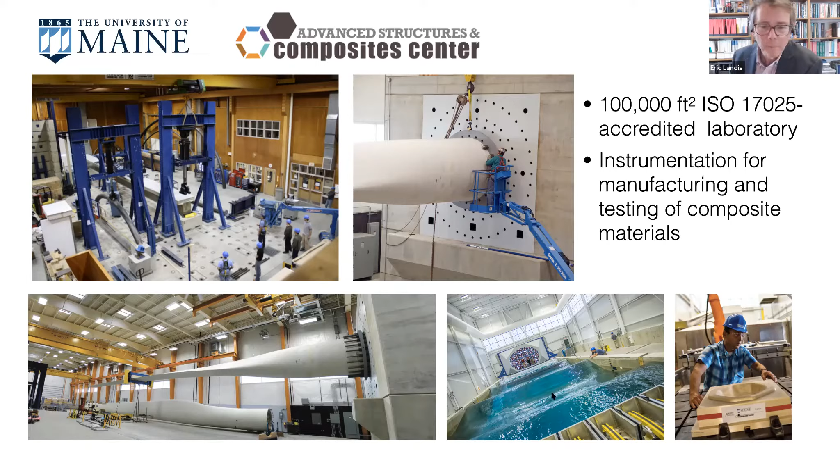Now, before I get into the work, I do need to do a little plug for my home institution. I'm part of a group called the Advanced Structures and Composites Center, and this is a fairly significant research unit under one roof, and it's a big roof, over 100,000 square feet. We can manufacture different materials, composite materials, wood composites, concrete composites, test them at a very small scale, atomic force microscope scale, and even a very large scale. And when I say large scale, I mean a very large scale. In our offshore wind lab, we're actually testing wind turbine blades that have been up to 60 meters long. So those are big structures.

What's relevant today, what got us started in this laboratory is engineered wood composites. So we're doing a lot of work. We've got some active programs on a variety of wood composites, including what you're going to learn about, mass timber.

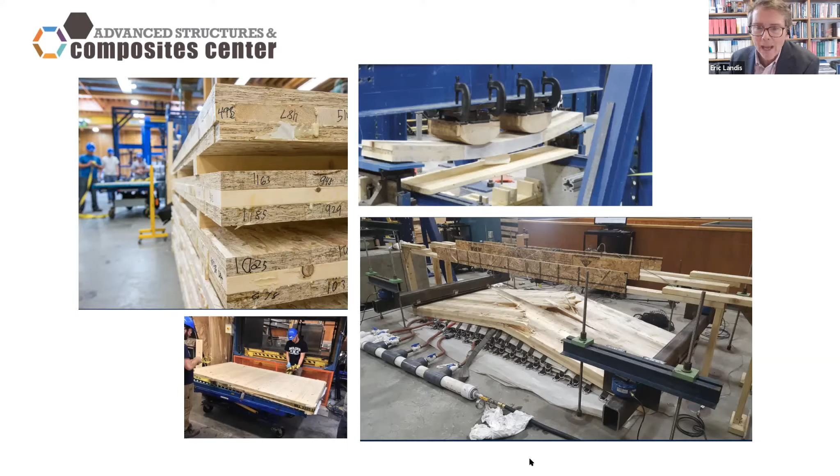So mass timber, if it's not a term you're familiar with, basically it's a new way of looking at how we build wooden structures. Most of you are probably familiar with, at least in the US, very common, probably most common for small buildings and houses, light frame where you have stud walls and then panel product, something like plywood or oriented strand board to provide shear resistance. But you're very limited in how high you can go with that kind of construction.

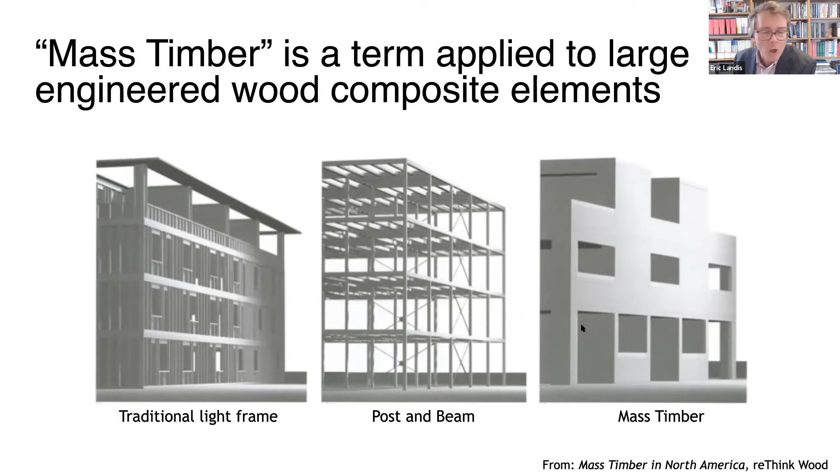Now with mass timber, you're actually taking dimension lumber, not unlike in light frame, but now you're gluing it together into big mass pieces. They could be panels, they can be walls, floors, and that opens the door to being able to build much taller structures, because now we have much greater structural capacity, particularly with respect to stiffness, which is usually the biggest drawback on wood for tall buildings.

So the most common example of mass timber, well, the two most I would call are glulam, which has been around for a long time. I would assume most of you have seen examples of that, where we just stack up dimensioned lumber, might be 2x6s or 2x8s, into making a large beam.

The advantage of this kind of approach, even if you did have a big tree, is that you can grade each piece of lumber and put the best pieces in the places where you're likely to see the most stresses. So in a beam, you might put your best pieces of wood in the top and bottom, and put all your junk in the center.

Now with cross-laminated timber, it's a variation on that theme where we make up panels instead of beams and columns, using dimensioned lumber glued together in different layers, where one layer has the axis of the boards going in one direction, and another layer goes in the transverse direction.

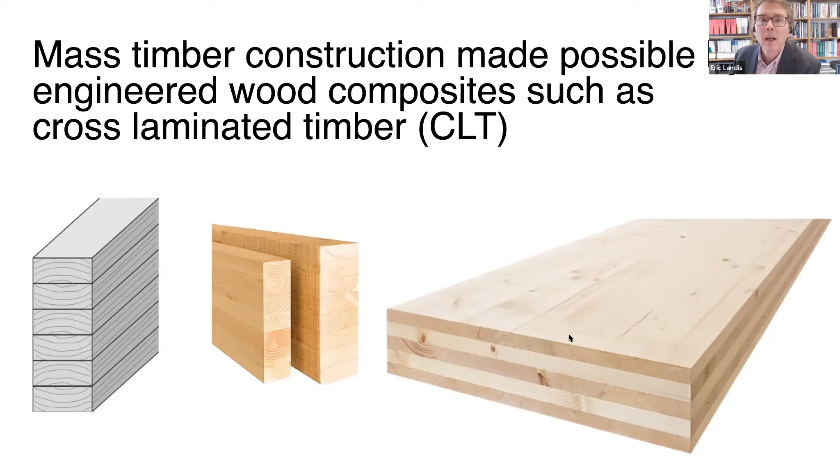The principle is the same as plywood. If you're familiar with plywood, you have thin veneers stacked up to give you some degree of transverse isotropy. In fact, I've heard people refer to cross-laminated timber as plywood on steroids.

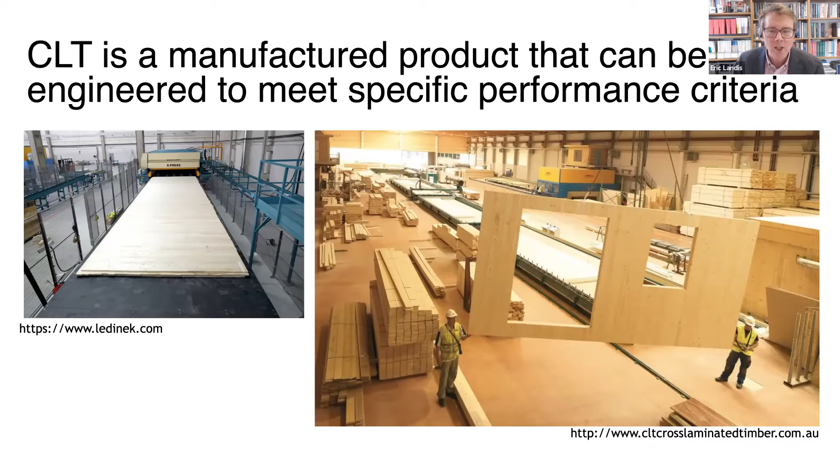So these are engineered products. Again, we can build the different elements to particular specification. And using these is a very popular way to develop building construction in Europe. You have building companies that have what we might call Legos for grown-ups—a whole range of different elements that an architect and engineer can pick and choose to meet a particular design objective.

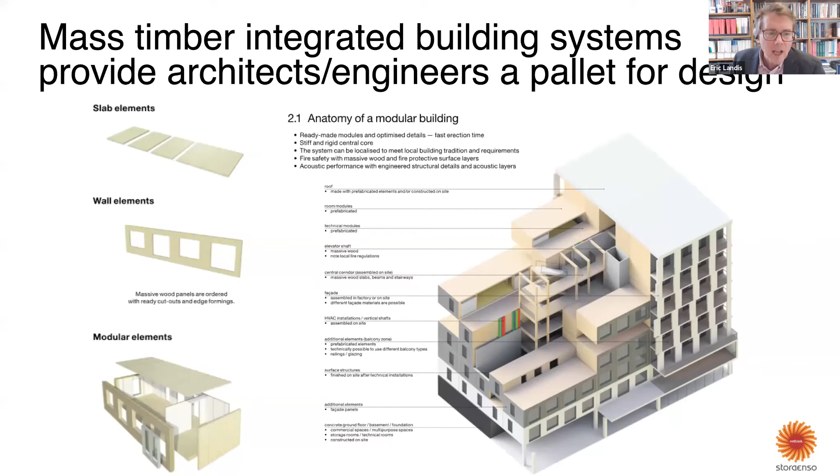One of the points I want to make about mass timber is that there's really no such thing as a mass timber only building. We're almost always going to be integrating mass timber with other materials.

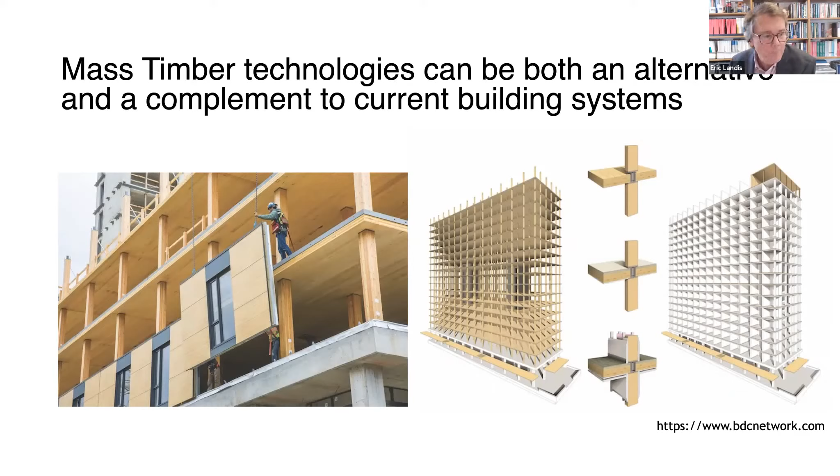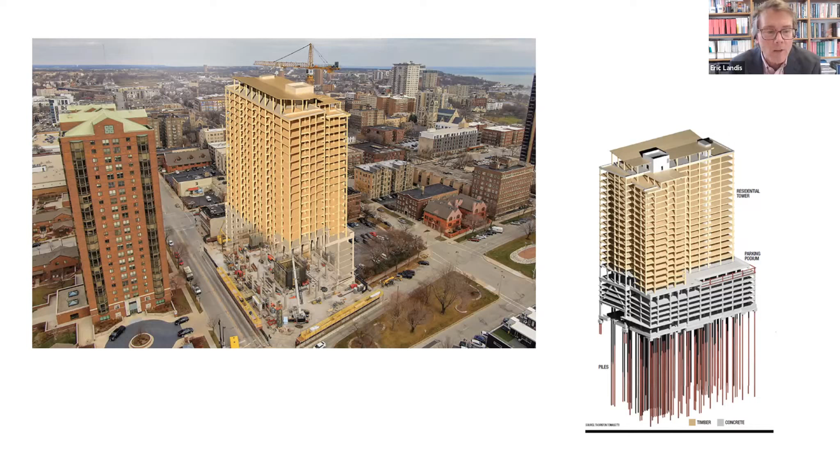For example, this is a rendering of a building going up not so far from you in Milwaukee. It is a mixture of reinforced concrete at the lower levels and mass timber in the upper levels. And while this would not qualify as a super tall building, it certainly qualifies as a high rise.

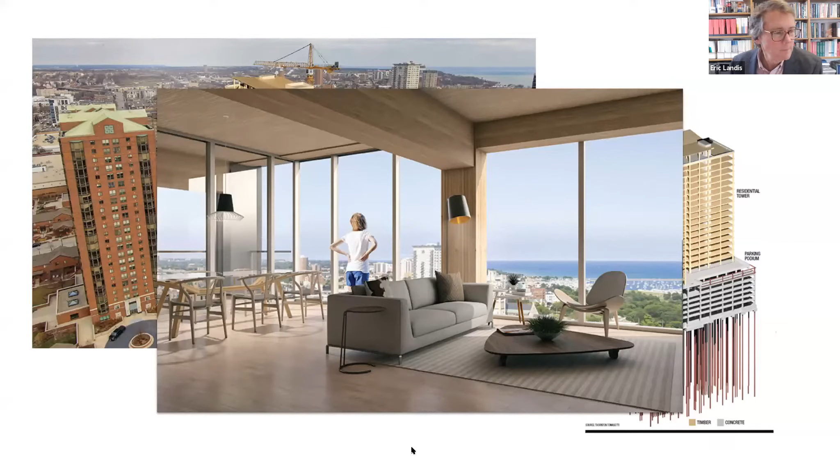I don't know about you, but that looks like it could be a pretty nice place to live, if you need to live in Milwaukee. Actually, I'm from Milwaukee, so I'm making fun of myself.

Some of you may be familiar with the Skidmore, Owings and Merrill project, where they took what for them is a run-of-the-mill skyscraper and redesigned it with mass timber, making sure they could meet all the required structural specifications, and then looking at the impact on overall carbon footprint. They found several different alternatives, and recognized that even a mass timber building will have some steel, concrete, and so forth, but they did find an overall reduction in the embodied CO2 of the high-rise buildings.

And they could meet all the structural criteria.

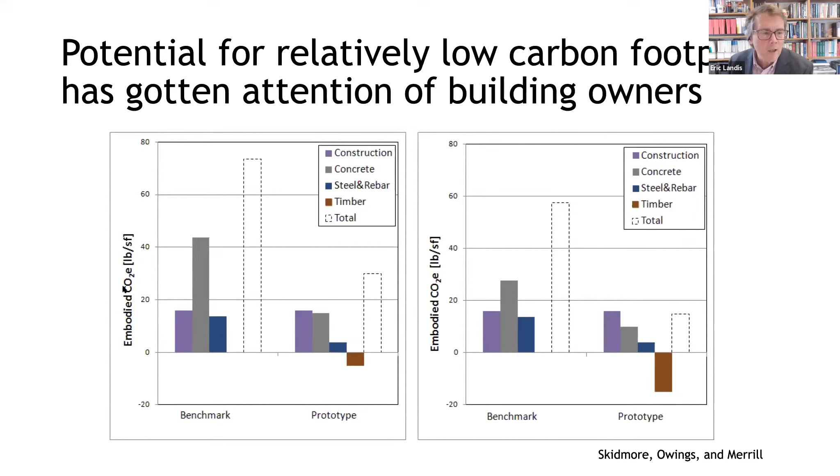Now, why might somebody want to do this? Well, you've certainly heard of conspicuous consumption—there's an alternative called conspicuous environmentalism. You know, the idea you want to drive a Prius to show how green you are. Some building owners may want to do the same, have these timber structures, because this is a green material, it's renewable, and the wood actually is a carbon sink.

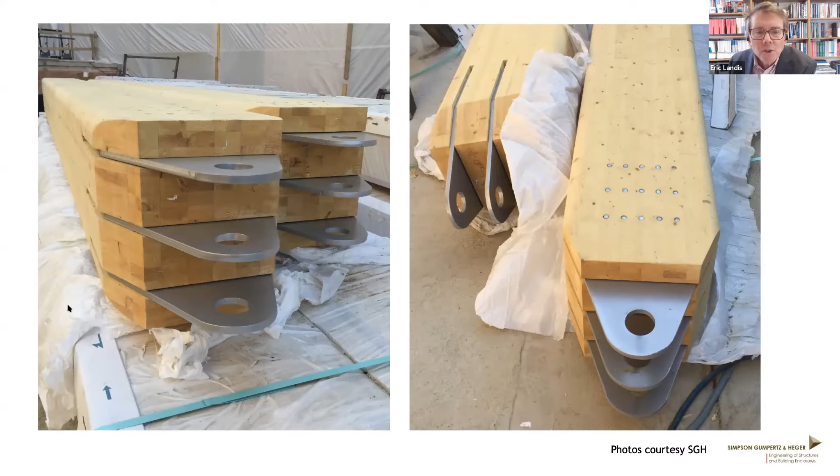So that's one reason for the rise in popularity. Now, if you're familiar at all with timber construction, the biggest challenge in building a large timber building is the connections. Here's where different approaches are used for steel connections. This is actually a building that was built at the University of Massachusetts at Amherst, one of the bigger mass timber buildings in the US.

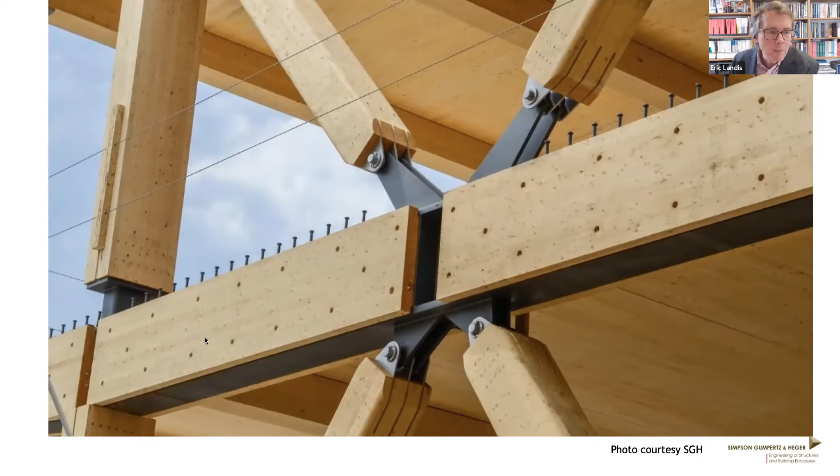And while the timber is the primary structural system, one problem with wood buildings is that they tend to be loud. So in fact, for this particular structure, you'd see all these little pieces sticking out—that is to anchor into the concrete floor. The concrete floor allows them to have a little bit quieter, more conventional building for the tenants.

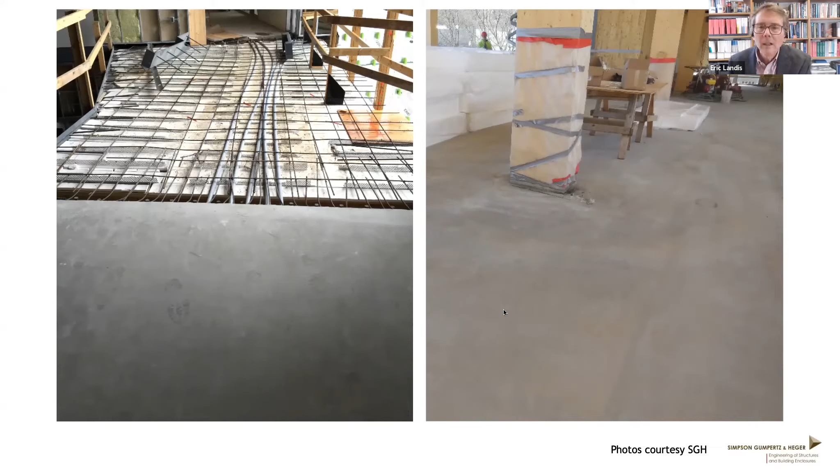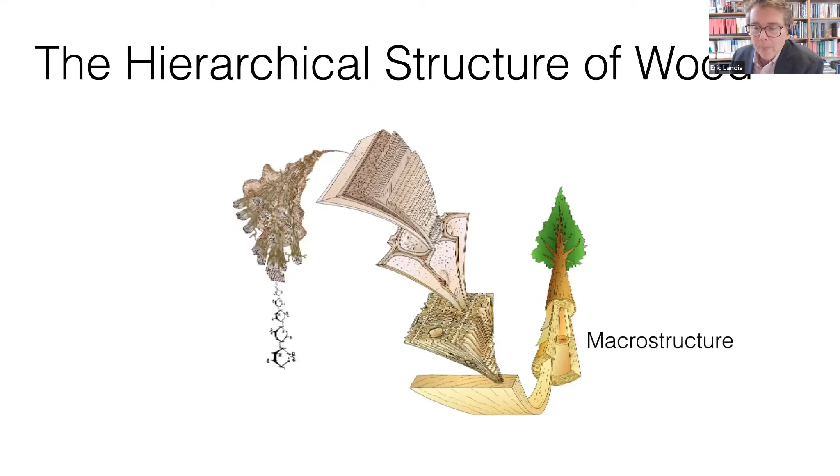So with that introduction to mass timber, before I go to our specific research, I feel we probably need a brief review on wood as a structural material. Wood is very much a hierarchical material, not unlike concrete and some of the other materials you work with. We have a macrostructure scale with features we can see with the unaided eye, a mesostructure, a microstructure, and if we need to, we can go down to the molecular level.

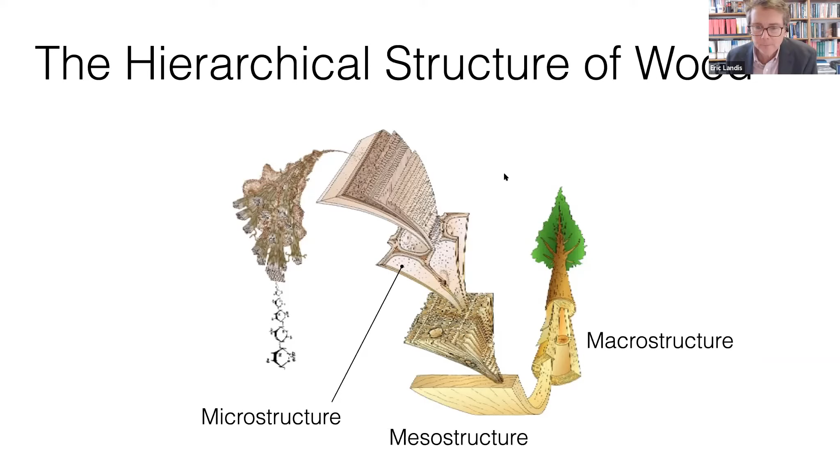The focus today will be primarily on mesostructural features and their role in structural performance and structural properties. With that in mind, one more introduction is the coordinate system I'm going to use through the rest of the talk. We use a longitudinal axis for the axis of the log, and then a radial direction that extends from the center, and the tangential direction. The primary reason for establishing these is that those are the three principal directions that define different material properties.

While if you have a board like this, you could approximate it as an orthotropic material, but it's not exactly, because of the circular grain.

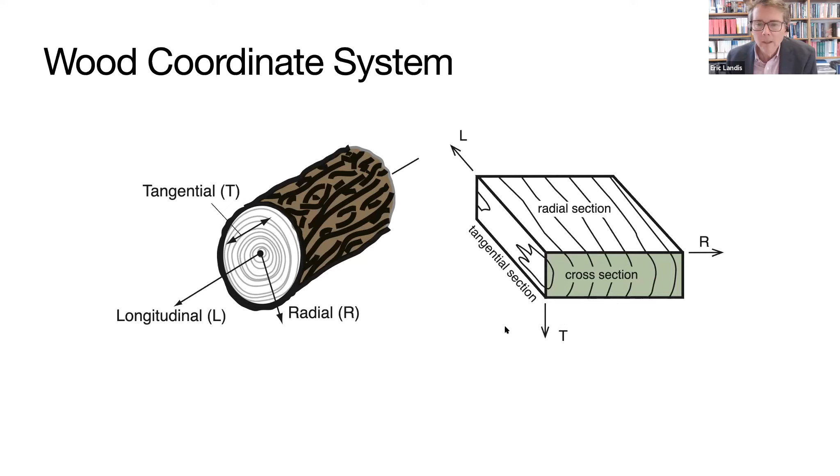Just a little bit of vocabulary to get you up to speed. Everybody sees the bark, and if you've ever peeled away bark, you get this kind of wet, slimy layer. That's the cambium. That's actually the only part of what's referred to as the stem or trunk of the tree that has living cells.

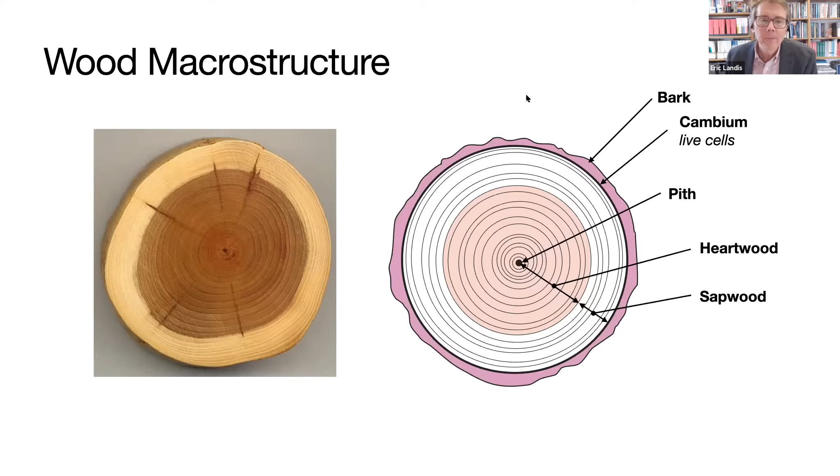So the tree, when it grows, actually only grows out. I use what I call an engineer's view of tree growth, showing this little sapling on the forest floor, and a tree grows up by growing out. For example, if one were to put a nail in the side of the tree, that nail will never move up. It will stay exactly where it is, and the tree will grow up around it.

This is significant for several reasons, but in fact the structural properties change as the tree grows. Towards the center, we have what we refer to as juvenile wood, and there the wood tends to be a little more compliant, because compliance is better for resiliency if the tree can flex a bit. But of course, like with skyscrapers, as we get taller and taller, the wood needs to gain some stiffness. In fact, the wood at the outer part of the stem tends to have better structural properties than in the interior.

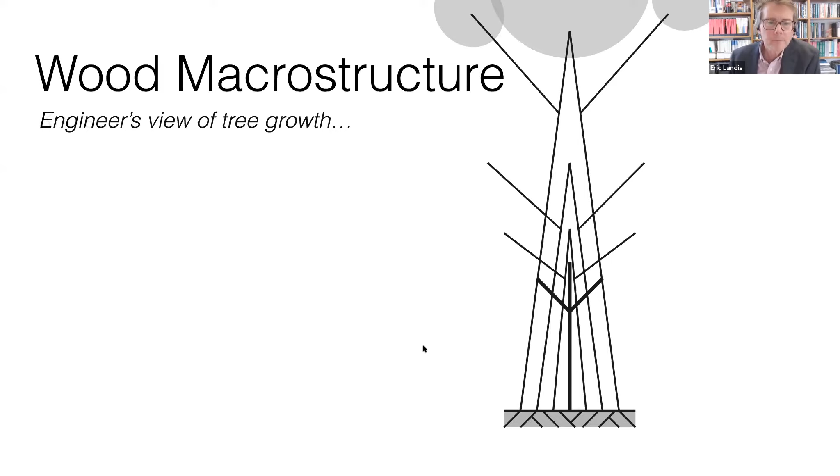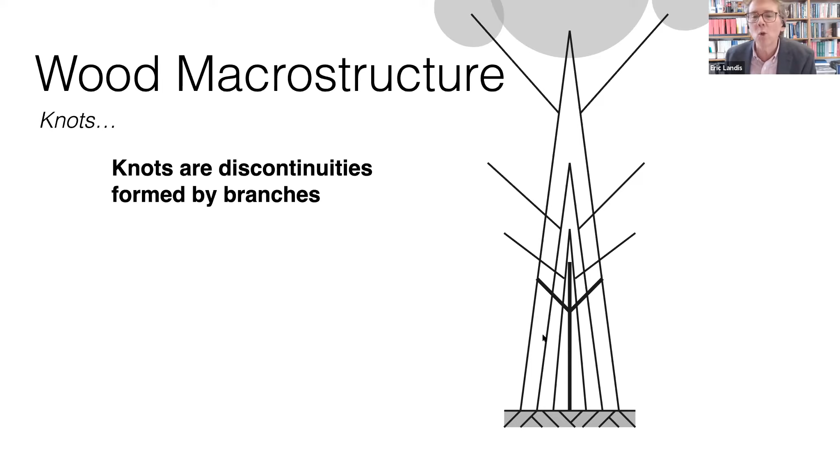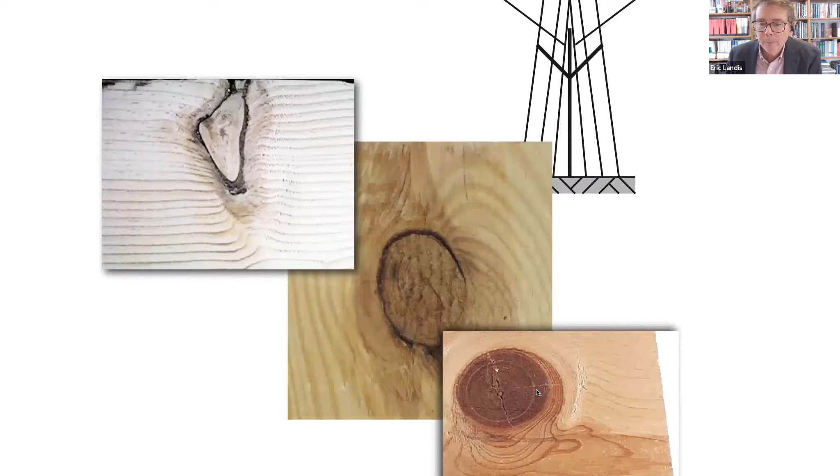I'm not going to talk about this in our research, but in evaluating suitability of a particular piece of lumber, knots are one of the key factors. Knots are just discontinuities formed by branches. As a little tree grows branches, eventually those branches get completely subsumed by the tree growing out, and what we're left with are these different knots. Sometimes the knots are continuous - they refer to that as a green knot, because that's actually an integral part of the wood. We refer to others as black knots or dead knots, where there's a literal discontinuity because the tree grew around a branch that was already dead.

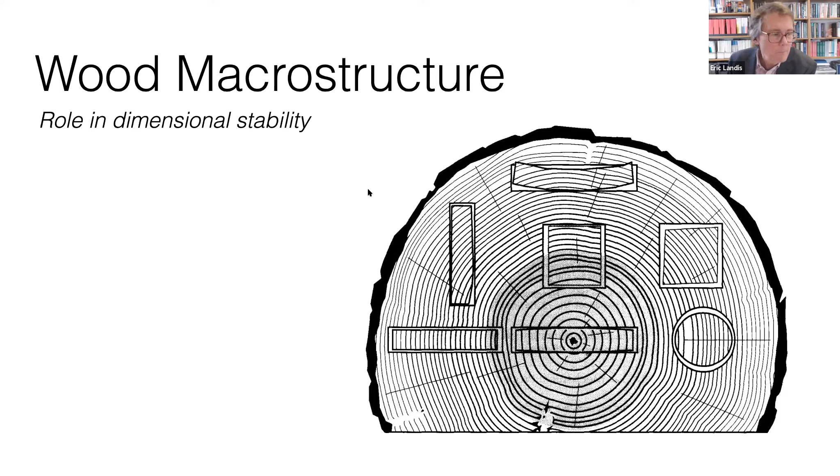Now the last structural issue I want to talk about is this cellular structure. The engineer's view of this wood mesostructure is to think of it as a bundle of straws. This is a very accurate way to represent the material, both in terms of elastic properties and failure properties - what do I have to do to fail the wood? We could just use this straw analogy.

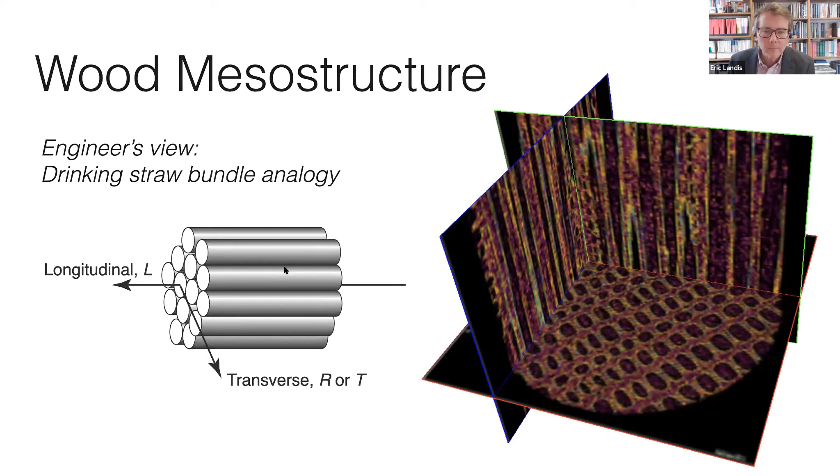This shows X-ray CT images. Unfortunately, I committed the cardinal sin of imaging, which is I did not put a scale bar. But these are on the order of maybe 20 to 50 microns across, and they are definitely visible with the optical microscope. So the cellular structure - you have the cell wall, and then you have a hollow, what's referred to as a lumen.

The reason this is important is that while wood has elastic properties, and for example wood has a Poisson effect, that Poisson effect is not like one you'd see in a homogeneous continuum, because it's dictated not by the elastic properties of the continuum, but in fact by the cellular structure - how the cells are arranged is going to dictate the elastic constants.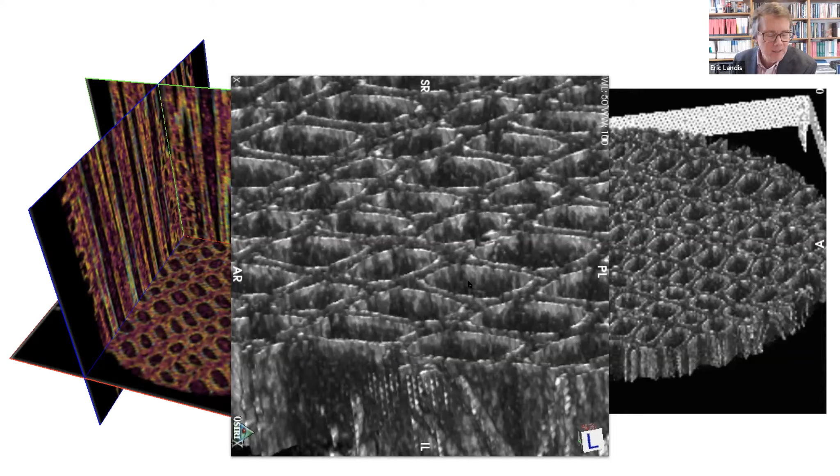And finally, I don't know if this is a universal feature of kids growing up, but when I was a kid and a tree got cut down in my neighborhood, I was always told, 'Oh, Eric, count the rings.' Because what does the number of rings tell you? It tells you how old the tree is.

And the reason we have rings - and rings are more pronounced in temperate areas where we have more variation in season - what the rings reflect is the fact that the tree does not grow at a constant rate through the year. In the spring and early summer, it grows very quickly.

And then you get these very large cells with thin walls, and this is referred to as early wood. Then later in the year, that growth rate slows down, and then you get smaller cells, but cells that tend to have a thicker wall, and that we refer to as late wood. So early wood and late wood is what gives that ring structure.

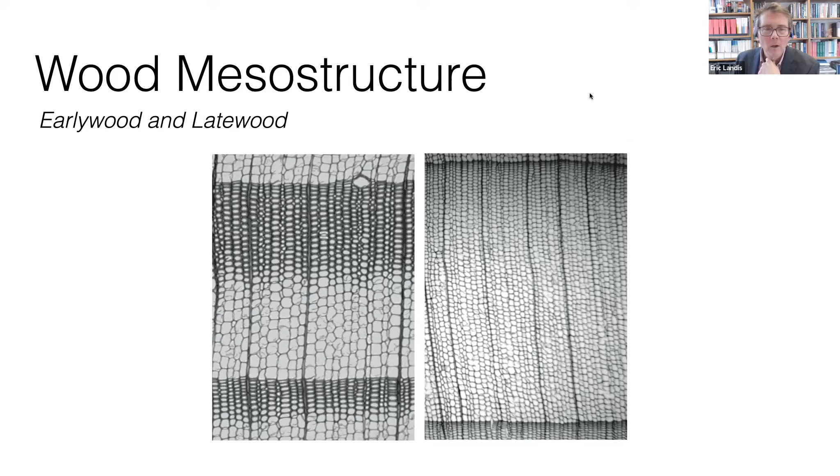Okay, so that ends my primer on wood structure. So now returning to cross-laminated timber, CLT. And of course, we've been building wood structures for thousands of years. So despite the fact that the wood mechanics is quite complex, at least we know how to work with it, and we know how to work around some of the problems we have with the wood mechanics.

However, up until cross-laminated timber, basically we were only worried about properties in the longitudinal direction, whether it's tension, compression, flexure, or shear in that plane in the longitudinal direction. But now with cross-laminated timber, we're introducing a new stress state that we don't really work with a lot in wood, and that is shear in what I'll call the radial tangential plane.

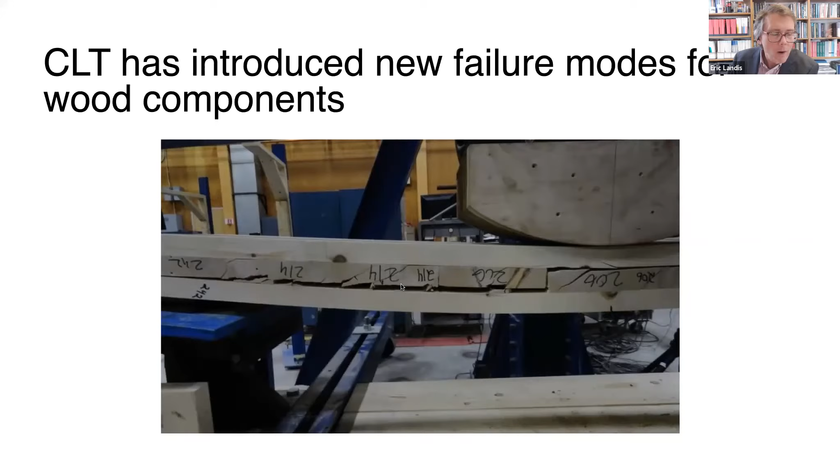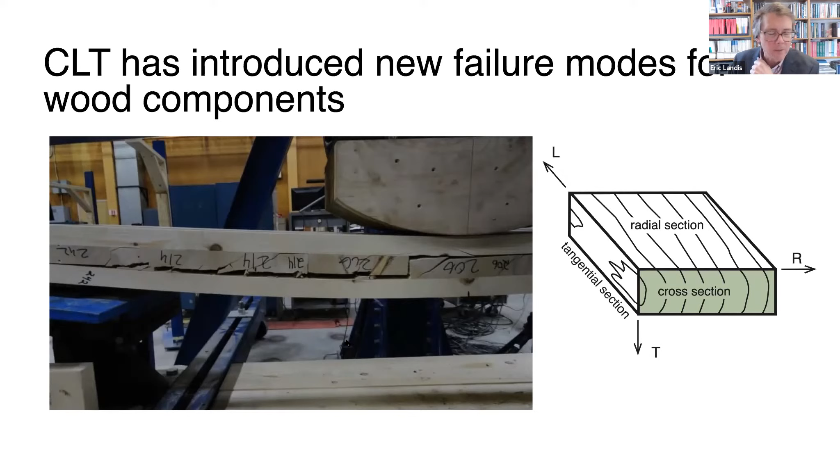So what we want to do is look at the fracture in this. So backing up, as a result, fracture properties of wood have been fairly well studied in the longitudinal direction and some variations of the longitudinal directions, basically crack growing in the longitudinal direction. Now we want to look at cracks growing in either the radial direction or the tangential direction. And that's the core of what I want to talk about with the rest of my talk.

And to put it in context, just a little shout out to Gianluca and his team. So we have this collaborative project in which we are looking at fracture failure at a mesoscale, but we want to be able to understand that modeling at the micro and mesoscale in a way that we can then better predict properties of wood at the component and even structural scales, which is not a trivial problem.

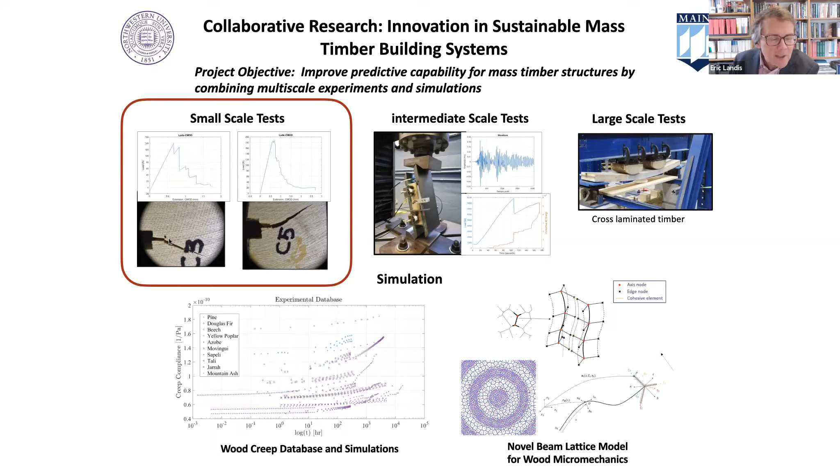So what I'm going to talk about is some recent results we've had with small scale testing of fracture in this radial and tangential direction.

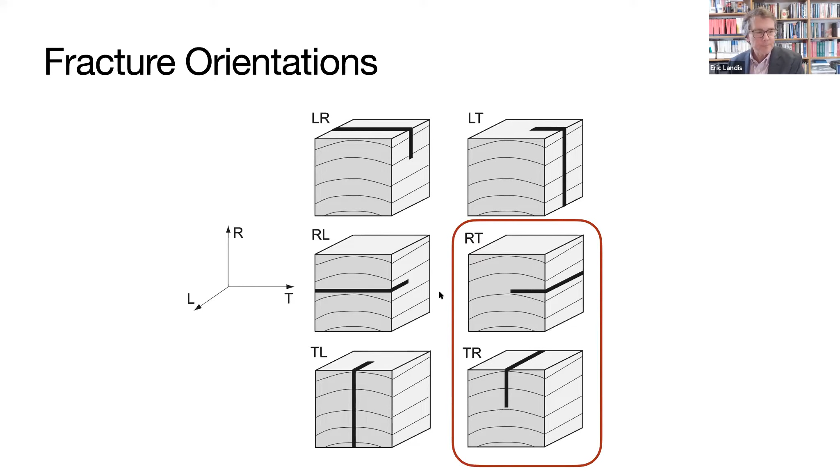So I'm just going to generally call this transverse fracture. For these tests, basically we use, something well known in fracture mechanics, a variation of a compact tension specimen. The species we're working with in wood, we always have to be concerned with that. We're actually using commercial lumber for this particular set of experiments in a species group called SPF, which is short for spruce pine fir. These three species are lumped together because they have fairly similar properties.

And for this test, what we're trying to do, best we can - and we realize we're not necessarily going to be successful - is control crack propagation in a stable way. And thus we use a closed loop testing system that uses crack mouth opening displacement as the control mode.

As part of the experimental system, we have a digital camera for measuring or monitoring the crack growth. And we use specimens with different grain orientation.

The way we're defining the grain orientation is an angle alpha, which is the angle between the horizontal plane of the crack and the tangential direction. So if alpha is 0, that means we are propagating a crack in the tangential direction. If alpha is 90 degrees, the crack is propagating in the radial direction.

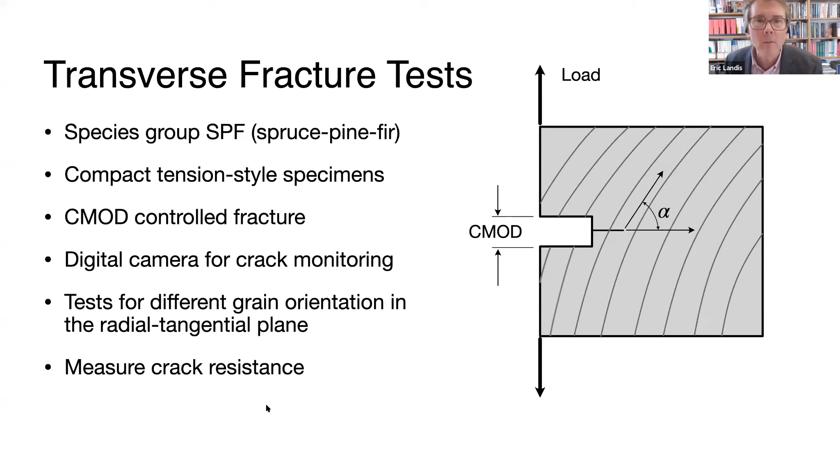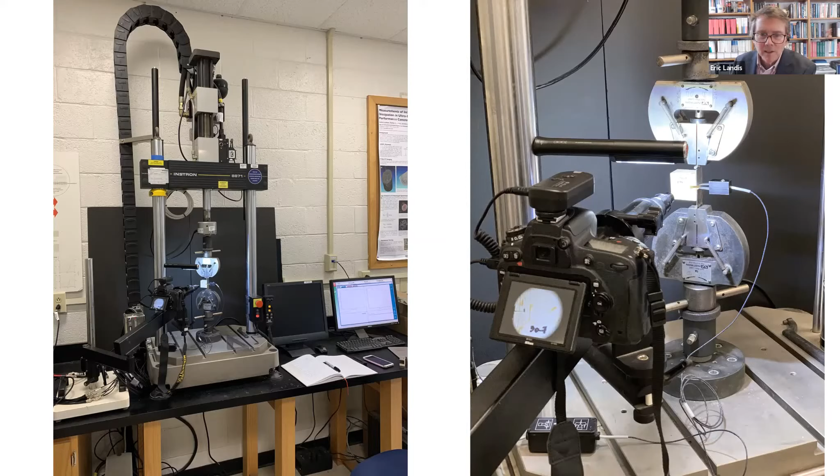Our experimental setup: we have a closed loop load frame, showing the digital camera with a microscope lens attached, zooming in on the specimen.

This is a specimen with an alpha angle close to 90 degrees, because the crack plane is the radial direction, but the alpha is pointed in the tangential direction. Here's a clip gauge to monitor crack mouth opening displacement. For most of the tests, we use the feedback, the output from the CMOD gauge, to control the test under a closed loop system.

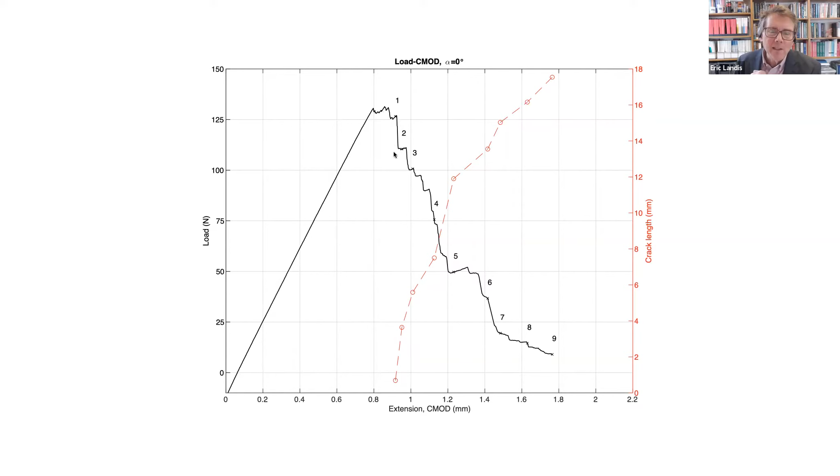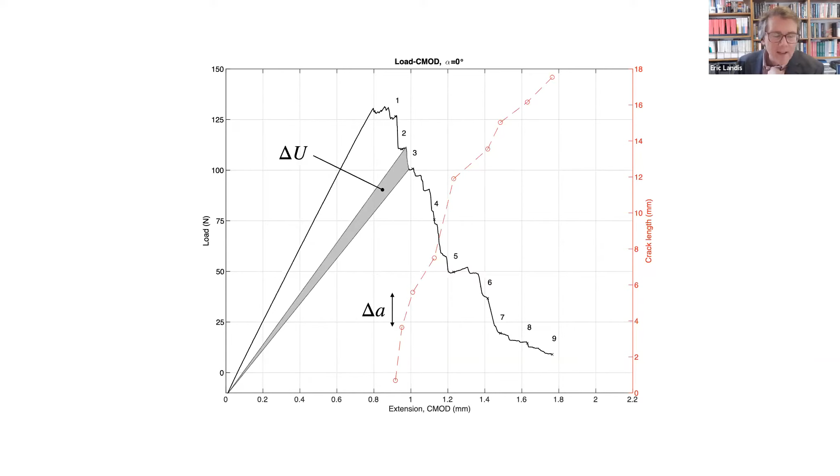For our crack resistance, we're interested, as best we can, in incremental crack resistance. So over a range between two different points, in this case between 2 and 3, we measure the change in the dissipated energy, and the corresponding crack growth over that range. We just say the crack resistance is simply the energy divided by the crack growth area, which is the crack length times the specimen thickness.

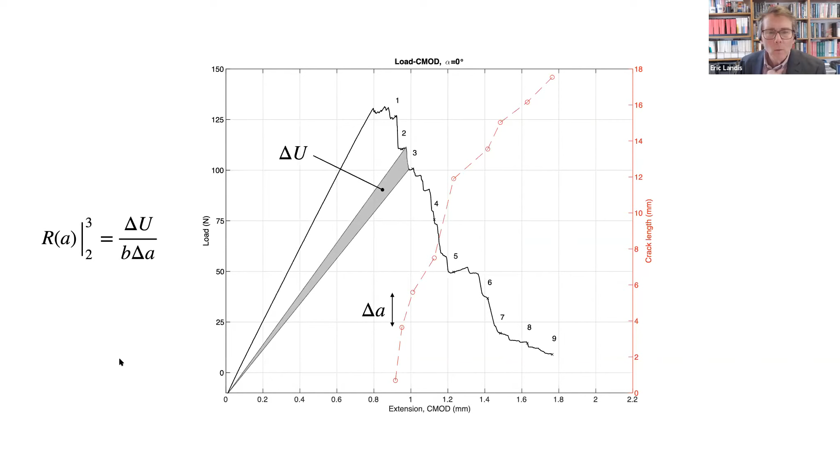The first result I'll show is angle of 0, so the crack is propagating in the tangential direction. Again, what we see is relatively stable crack growth, a fairly stable descent in the load CMOD curve, and a relatively straight crack growth.

We do see some fair amount of variability in the crack resistance as the crack grows, although we're not necessarily seeing anything that would resemble a rise or a fall. We wouldn't necessarily call it a rising or dropping R curve.

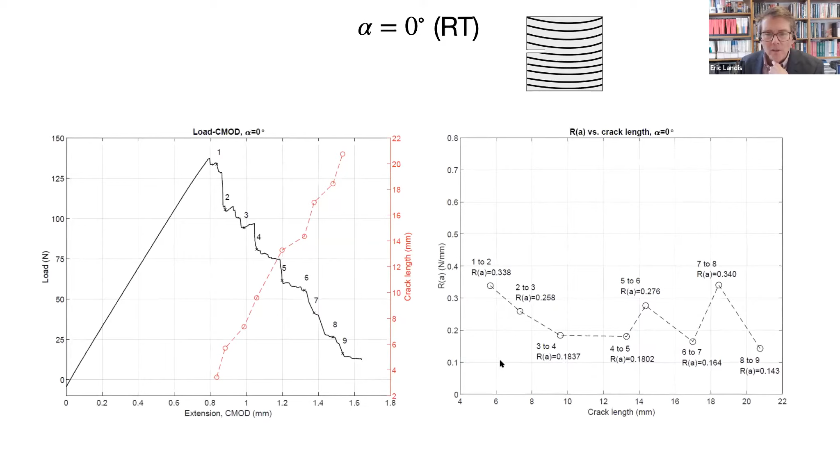Let's compare this to what we see in the images. So we've got the crack growth from 1 to 2. What I failed to mention before is, just like in a regular compact tension test, we prime the crack a little bit -- we cut it with a little razor to get the crack growing, started.

Then as it goes, you see the crack simply follows the early wood. Not necessarily obvious from the image, but you definitely see the early wood, late wood sections. In this image, the light areas are the early wood, the darker sections are the late wood. This is exactly what we would expect -- with these thin cell walls and bigger cells, we'd expect that to be the path of least resistance.

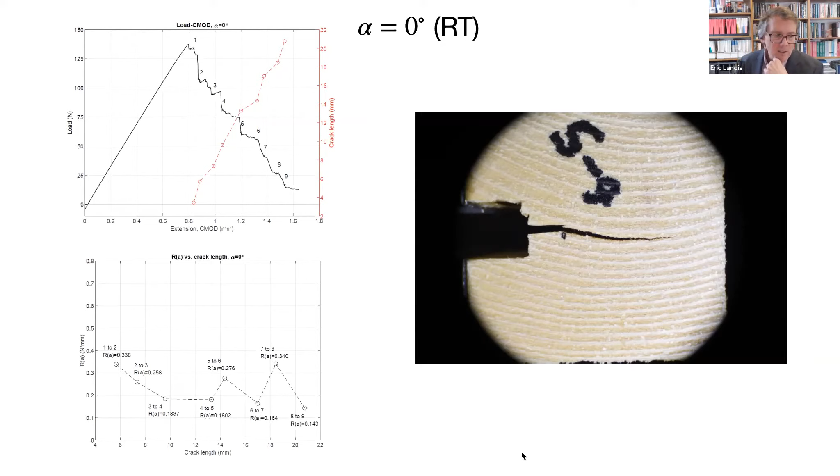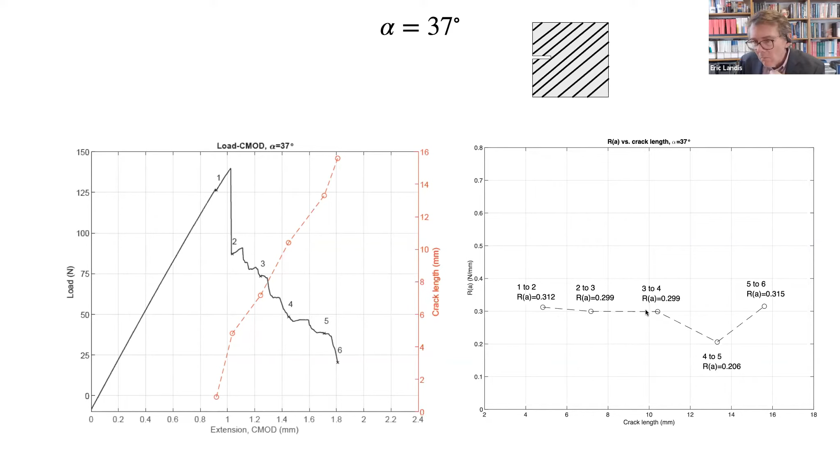Now if we turn the specimen, this angle is 37 degrees. We see some instabilities in crack growth, at least initially relatively constant resistance. Let's see how that compares with how the cracks grow.

Unfortunately, the crack grew right through our label, but here again the crack simply propagates along this early wood region.

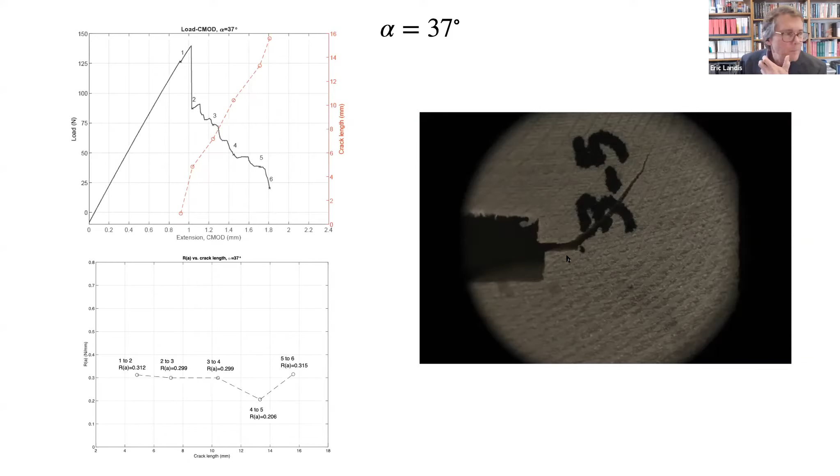Of course, fracture theory tells us that at least if this were a homogeneous elastic material, to maximize strain energy release rate we'd want to go straight. But because of this lower resistance, the crack curves.

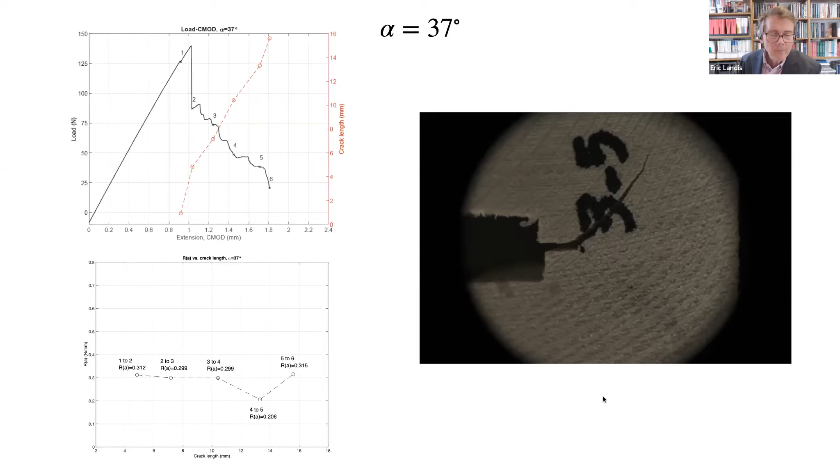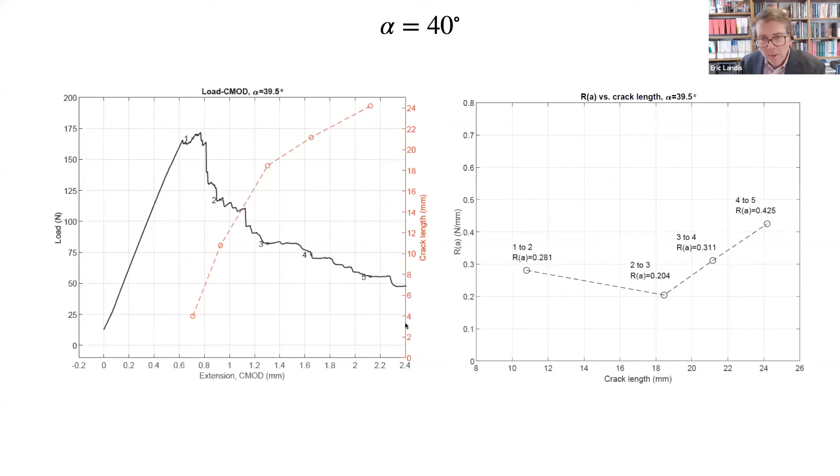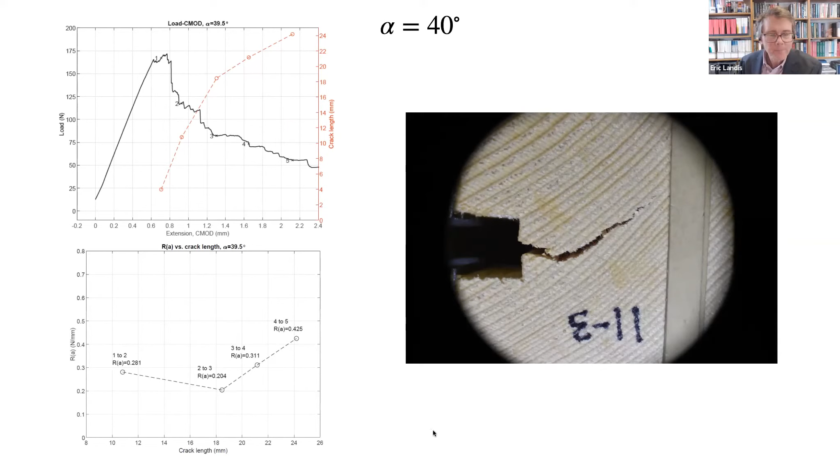An interesting thing starts to happen just a few degrees more. Again we see some instabilities, but otherwise stable crack growth. But now, looking at the cracks, we see the crack wanting to follow that early wood path, but the angle is steep enough that we start to cross over the late wood, meaning we've got to break through what would seemingly be a stronger section of the material.

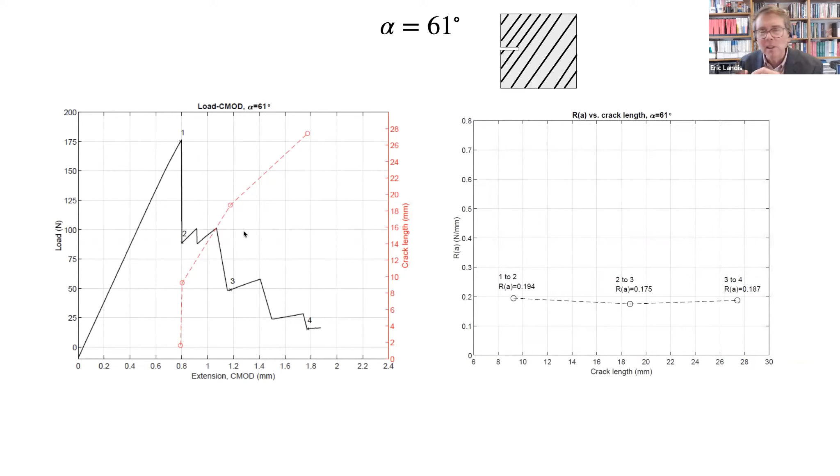Then we do have a gap, I admit, but now they go to an even steeper grain angle, and now what we see is definite regions of crack instability. Despite the fact that we have CMOD control, you can picture if a crack is going from a region of higher resistance to lower resistance, once it gets through the high resistance, it's probably going to have enough energy to propagate through.

Now, what we found of interest here is the early wood, late wood orientation is, again, 60 degrees relative to the initial crack. It's a little hard to see because we're seeing artifacts of the saw cut, but the rings are in this direction, and the crack just turned and goes normal to the rings, which is directly in the radial direction.

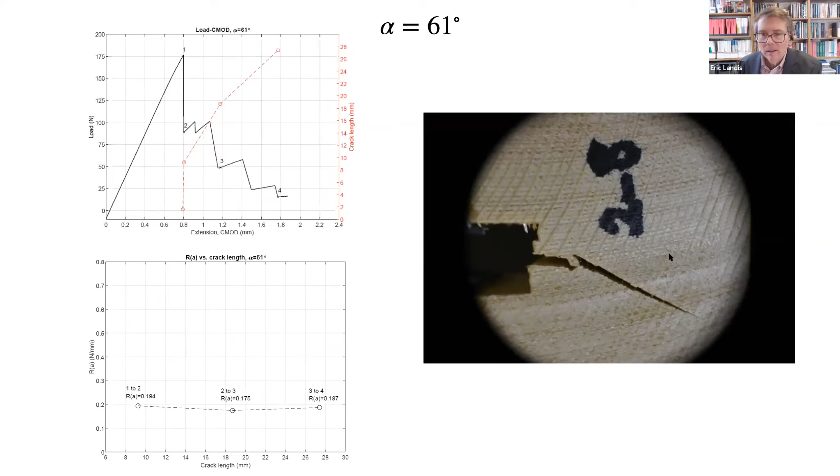This implies that the radial direction has less resistance, even than going straight. And then finally, if we go to 90 degrees, this is what's referred to as TR again.

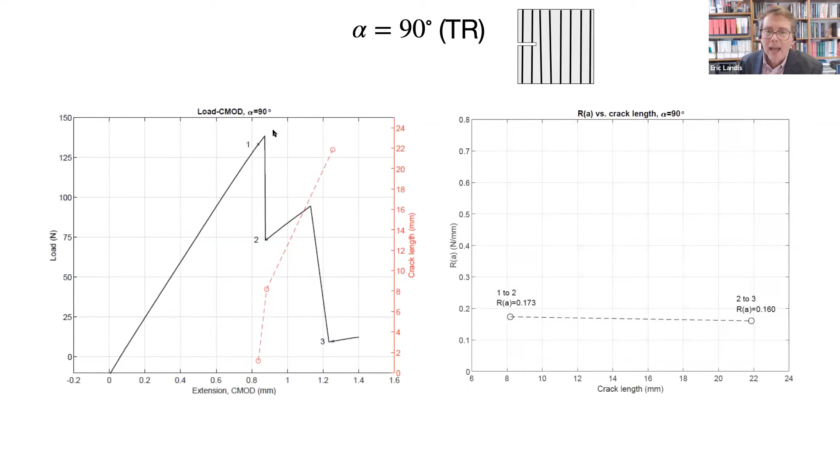Now it's definite sections of unstable crack growth. And if we look at the images of the crack growth, again, the saw artifacts might be showing up here, but the grain of the wood is vertical here, and the crack simply propagates straight across with very little resistance, and basically no toughening.

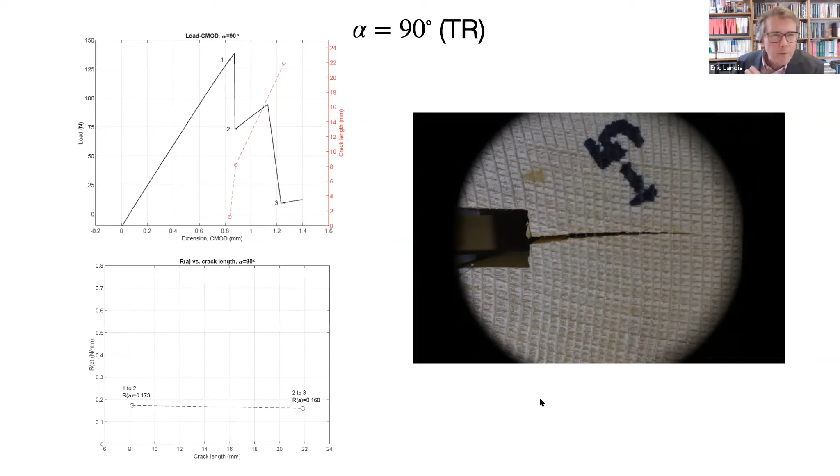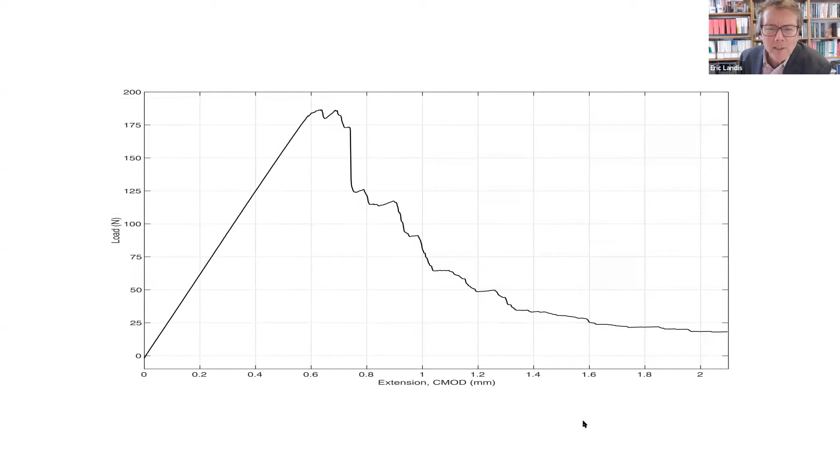Now, something I want to point out for those of you who are experimentalists and spend a lot of time in the lab, sometimes you look at these curves over and over again, and you just can't help but see certain things. In this particular example, we just could not unsee Maine was hiding in that little region there. So this particular failure mode became the Maine failure pattern. For those of you who are not familiar with this, it's my home state.

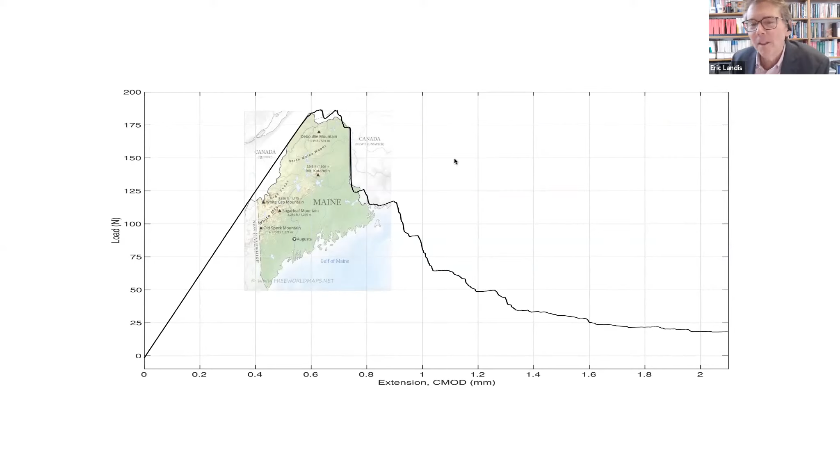All right, so some observations summing up what we've seen. So alpha equals 0, this is propagating a crack in the tangential direction. Basically, the crack stays in the early wood, and we have very stable crack growth. We have a high variability in crack resistance, but we don't really see any toughening.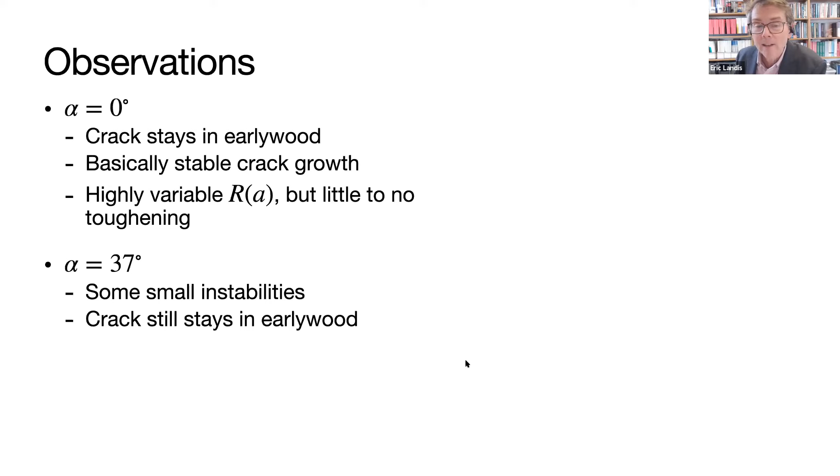We increase that angle, and now we start to see some instabilities, but still the crack stays in that early wood, propagating along in that tangential plane. But at some point we see a transition where the crack wants to maximize energy release rate, so it starts to migrate through the late wood.

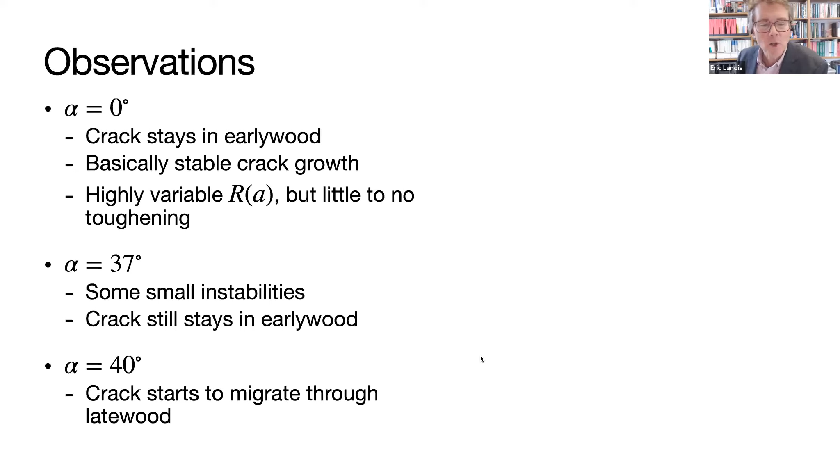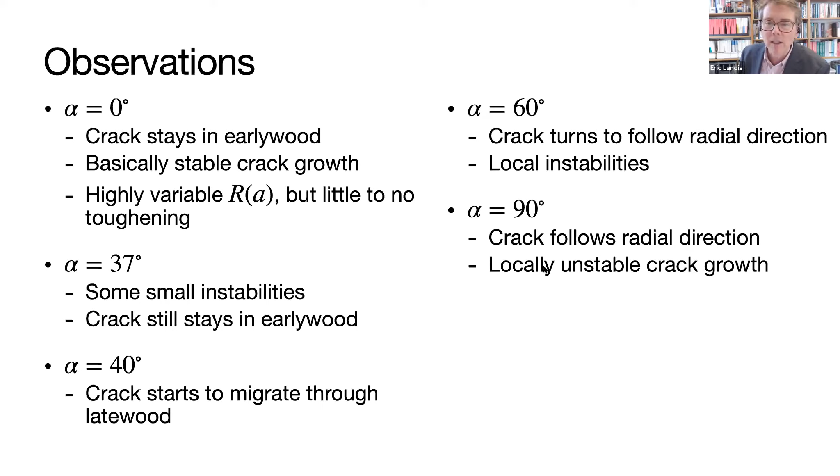And as we get even higher alpha, now we start to follow the radial direction, and that is accompanied by local crack growth instabilities. And finally, when we go in the purely radial direction, we have locally unstable crack growth, and the crack will just propagate in that radial direction, which suggests that, in fact, the radial direction of crack growth has lower overall fracture toughness than the tangential.

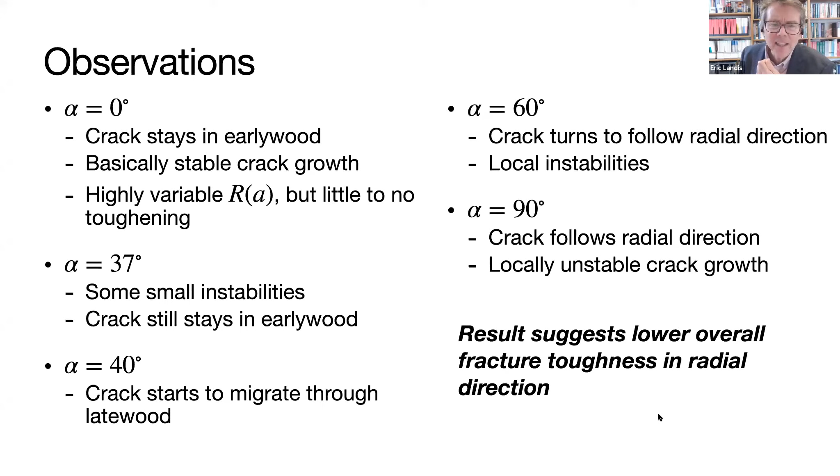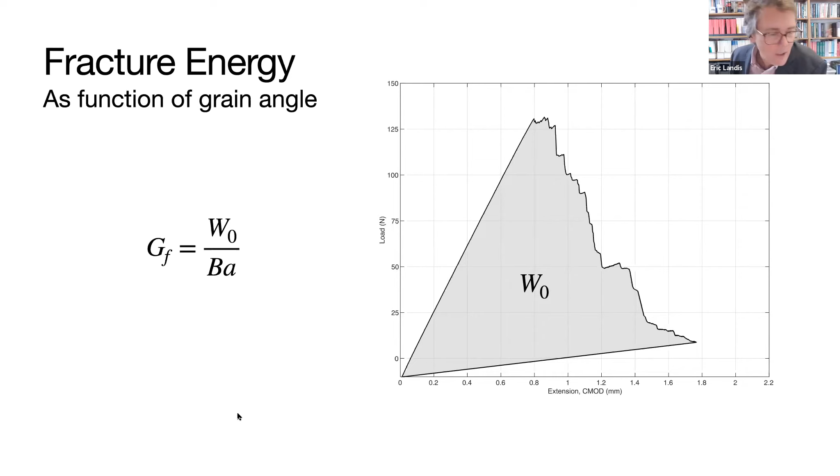To test this in another way, we took our data and, dusting off my fracture mechanics of concrete, we just looked at overall fracture energy. So we take the energy, we basically load the specimen out as far as we can, get the area under the curve, and divide that by the change in crack area, and plot that for different angles.

And of course, statistical significance may be a problem, but the trend we want to see, or that we see, whether we want to see it or not, we get an increase and then a decrease. So in fact, the radial direction, which is represented out here, is lower. And I want to emphasize that at 90 degrees, remember, we had all of this unstable crack growth.

So in fact, we have no way to properly measure the energy dissipated because of the instabilities. So therefore, these values out at 90 degrees, we can say fairly conclusively, is an overestimate of fracture energy.

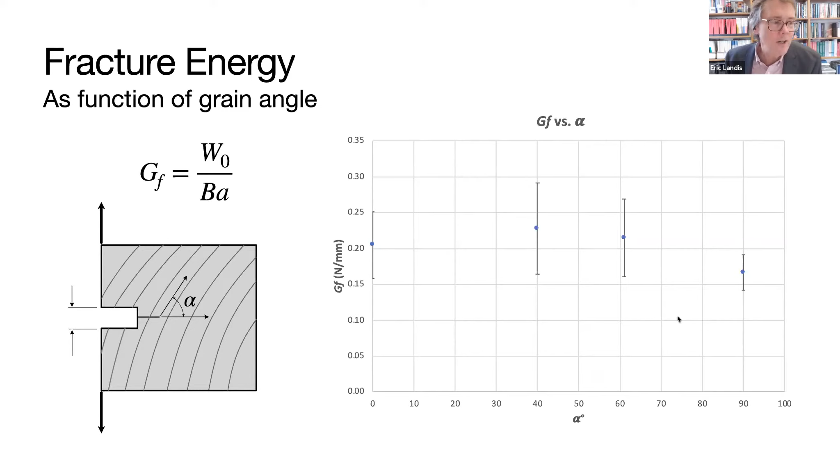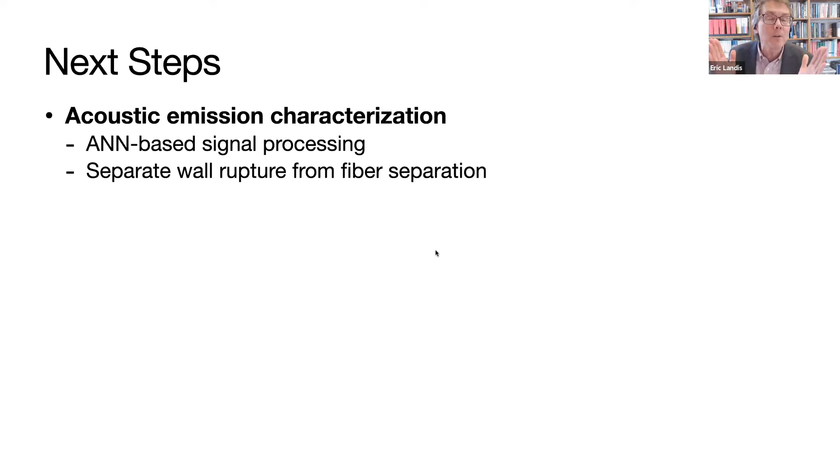So what next? So what we're very interested in, I mentioned that we're interested in the morphology and the localized failure mechanisms, what aspects of the wood are we failing? So what we've got going on right now are some acoustic emission tests that we hope will allow us to distinguish things like where we're rupturing the cell wall of the wood as opposed to just separating the fiber, pulling the fibers apart, because these wood fibers are discrete.

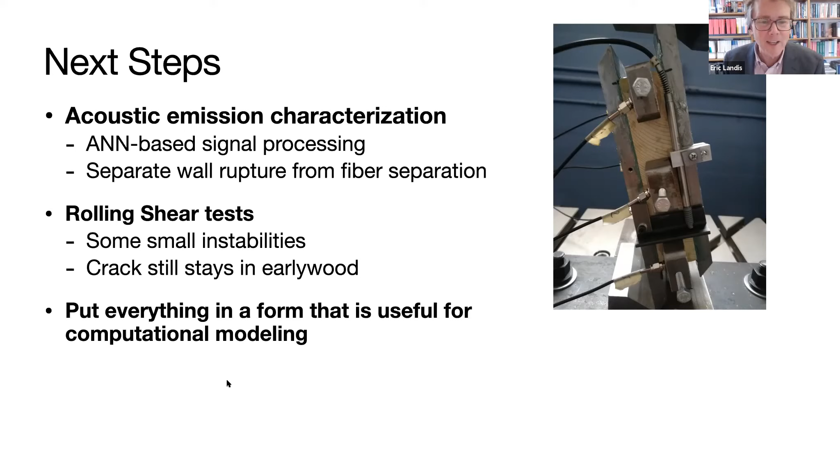And then for my friends at Northwestern, we want to put everything in a form that's useful for computational modeling, because we want to be able to appropriately predict performance at a component scale or even a large scale.

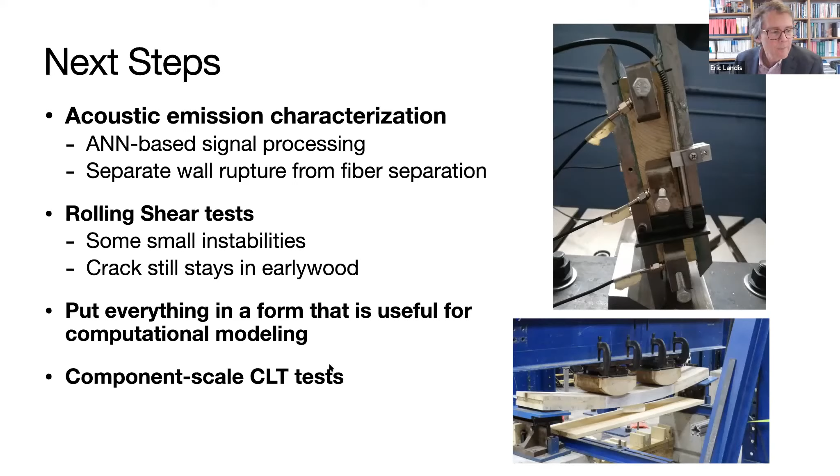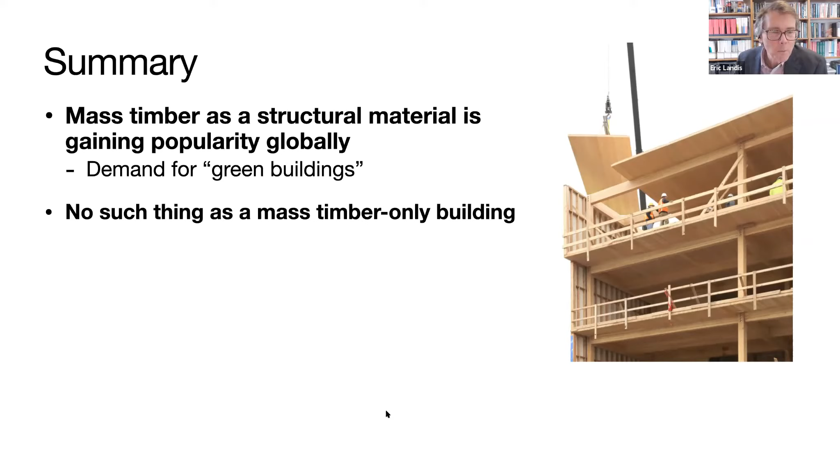CLT materials. So to summarize, hopefully you've seen mass timber as a structural material that's gaining popularity globally. I didn't really mention this early on: it's already quite popular in Europe, and only gradually gaining popularity in North America. I do want to emphasize there is no such thing as a mass timber only building. We're going to need different materials, particularly for connections and other structural aspects.

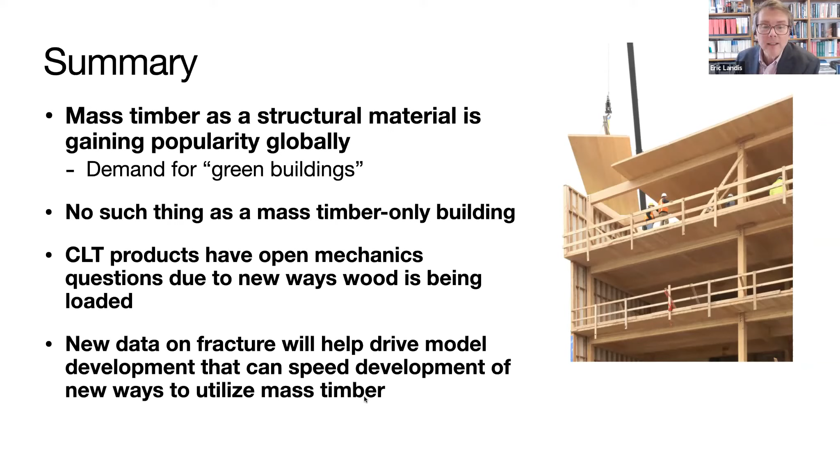But I mentioned the CLT products open mechanics questions because we're loading the material in ways we haven't before. Hopefully our new data on fracture will help drive model development that ultimately can speed development of new ways to utilize mass timber, which is really the end game here.

And with that, I will end my presentation. This is roughly what it looks like outside my window today, although not so many students. Thank you for your attention.

Thank you, Eric. It was excellent. Thank you. Let's unmute and clap, let's hear that you guys are there. Thank you.

Excellent, okay, so now the questions. I have one, I have one. Yes, go ahead, I say first.

So as you mentioned, one of the issues with the compact fracture testing is an inability to very accurately test, especially at that 90 degrees with all that instability, the energy released. You mentioned using acoustic testing, hopefully to give more insight into what is actually happening. Does that acoustic testing also allow for more accurate, would you be able to do similar angle-based testing to get more accurate insight onto what's happening across angles? And if not, what would be a test which would allow that?

Yeah, so the acoustic emission will not tell us anything about the instability. And I say it's not possible to test stably. I should qualify that - myself and my student were not able to come up with a stable crack condition. And I feel like I learned how to do this from some pretty good people, some of whom are here. But I think because of this variability in early wood, late wood, I'm not sure it's a possibility without some really innovative way to control, a much more sensitive approach.